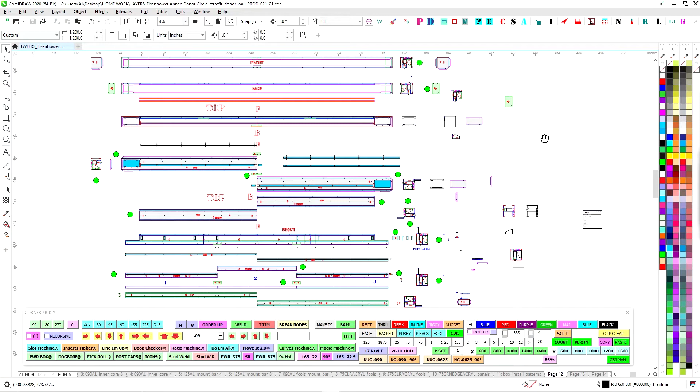All right, so Annen donor circle for Eisenhower here. Deceptively simple, but creating these boxes with slots in them posed quite a bit of challenges. We've got quite a few moving parts, but once they're all put together it shouldn't be that bad. We just have to make sure we follow the instructions and do things in order.

So you've got your parts. I broke it out to the outer shell of the 4-inch box, the outer shell of the 8-inch box, and then we have the inner cores of each: the 8-inch box inner core parts and the inner core of the 4-inch box.

You have 1/8-inch aluminum mounting bars, fairly straightforward. Put those together, and that's the top one. So you've got the top and the bottom, 4-inch and 8-inch bar. You've got the top letters here. Clamp the letters up to the bend scribe mark and bend the flange up. Just follow those instructions.

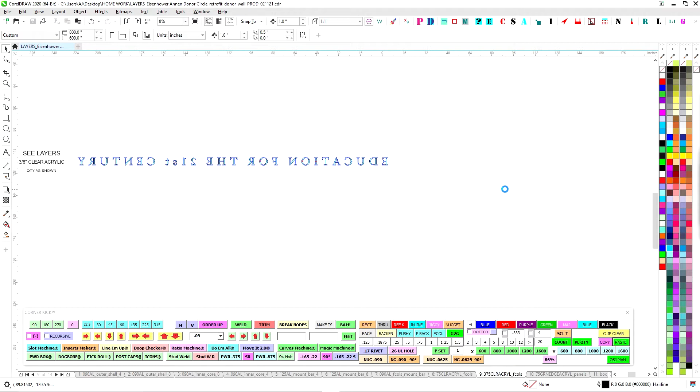We've got 3/4 inch acrylic with 632 studs, and same thing, we got 3/8 acrylic with 632 studs. Jim called out 3/4 inch green acrylic for that, green edge acrylic. Two mounting patterns for install, separate ones. So those are just the bars basically with instructions.

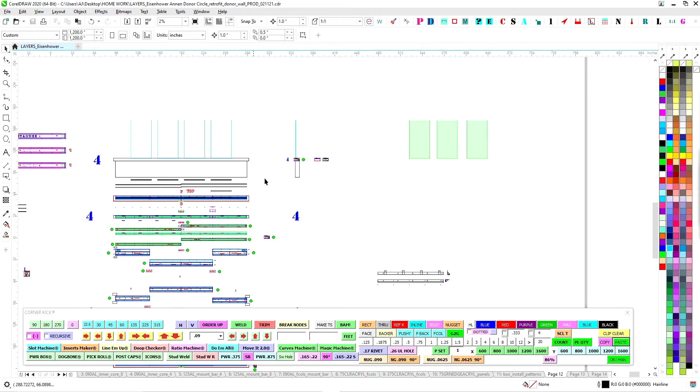From the very top level of this, I went ahead and broke this apart, because naming this bottom box and top box—well, talk about namespace pollution. Anything named top would be confusing, whether this is the top box or the top of the top box. So for naming principles, look for an 8 or a 4 on all the parts. That will let you know which family this belongs to. Anything with a 4 belongs to the 4x8 box, anything with an 8 belongs to the 8x8 box. So basically top box and bottom box. That being said, this is going to be confusing trying to show all this, so I went ahead and broke this out into another page.

So we'll go over here. That's the 4-inch. We'll do this like weightlifting—do the heavy stuff first, and then the other stuff will seem light. So like I said, it's not that hard, it's just got to make sure everything's put together in a certain order.

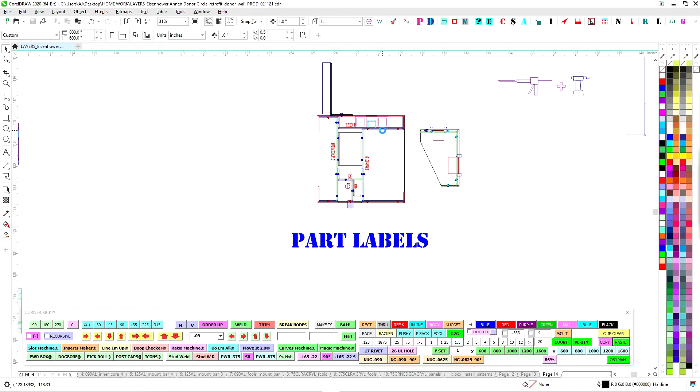So I made this to show how the parts are labeled, and essentially you're just going to start from the inner core right here with the smallest pieces, and then work your way out and assemble. Like it says over in the other thing, this is the outer shell, you'll just wrap it in the hard candy shell. So you start in the middle, do the core, and then work your way out.

And I have it exploded here, so this is what we'll do. You'll see that all this stuff is labeled.

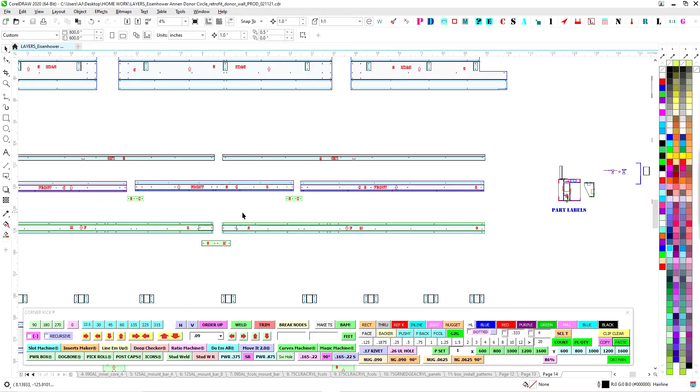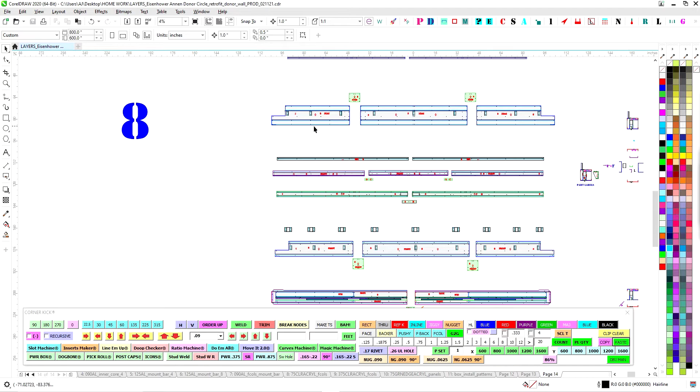The other part of the labeling name structure is, instead of left and right or whatever, I've got 1, 2, and 3. So 3 is always on the right side as you're looking at it, and 2 is in the middle—so if there's 3 pieces, the number 2 will be in the middle. The number 1 will always be on the left side as you're looking at it on the wall. So one side over here you've got the 2 in the middle, and then the 3 side over here, so all the 3s should line up on this side for all the parts, and all the 1s should be on this side. Anything 2 obviously is in the middle.

And then just look for stuff that's supposed to face the front—we'll say front. Anything with an arrow face, it's important that it is facing to the front, because like I said, this is asymmetrical. These mounting holes are important that they're going to this side. So again, just pay attention. It's not a hard thing to put together, but just got to make sure everything goes together the way it's supposed to.

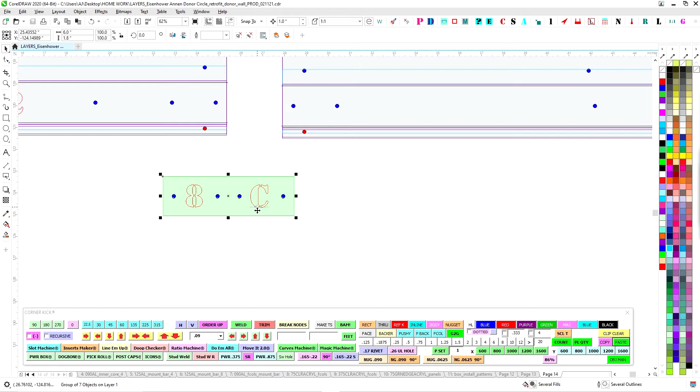So we'll start in the middle here. I'm calling this the C for center—it's this piece right here. You start with that, and then you'll have your LED tray, you put that onto that piece, that's second here. So backing up a little bit, what you're going to do is just get all these pieces, and you're going to Lord's rivet these together all as one piece first.

So get all these bent, get them clean, get them bent, and then you can go ahead and put these pieces together so they're all long extrusions. Same thing here - you're going to take these pieces and Lords-rivet them together. Get all of these assembled all together, and just be careful when you're dealing with them.

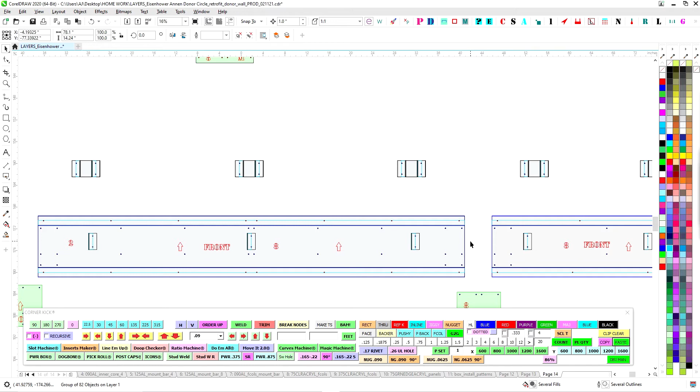They won't have the full Lords that we do on the sides, so they can bend - just make sure you're treating them with respect until they get all put together. With the lamination effect of all the staggered seams, these things are going to be super strong once we have them together. But like these guys here, you'll have this plate, go ahead and Lords and rivet that together. When you go to lift this thing, make sure you have support so it doesn't bend or fall apart until you get everything Lords together.

So I'm going to show you how to do that. Once everything's all in long units, go ahead and take the LED tray and put it together first. Then you can go ahead and Lords and rivet this stuff so it's faster - do Lords, do a couple clicos, and then just rivet it together and you can move on.

From there, you're going to go ahead and put what I call the M for middle - that's this middle angle piece, it's in green here with an M. So you have the C and the LED, you've put those together, and now you're going to bring the M together and go ahead and Lords and rivet that together, and now you'll have this inner structure here.

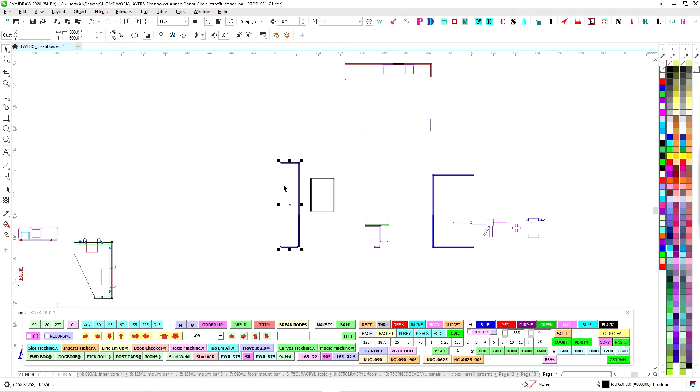Then you can either choose to do the back or the front, but I'd probably just do the front - might be easier to handle. Go ahead and take these guys, and once they're bent, Lords them to the back of the front here. So this is facing front, and go ahead and Lords those and rivet those.

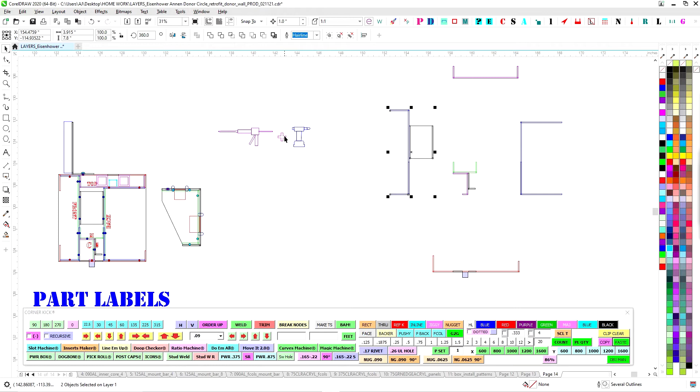You can go ahead and take care of that, then bring this whole thing together to the front. So you'll put Lords here - zoom in there, so you can put Lords here, and then Lords there, and then bring this together, and you're good to go.

Now you can see where this is, all that's left is to put the back piece on. So you'll just Lords this real good and Lords this, and that's the big top part here.

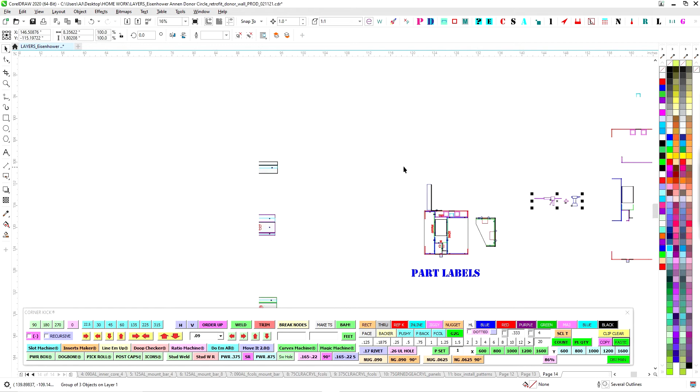So once you have this guy to this guy, and you have these all together, and you've made this core, and then you've assembled these little nuggets to this, and then you've brought all this together, then go ahead and take this whole structure and attach the back to it. And there you go - now you'll have this center core.

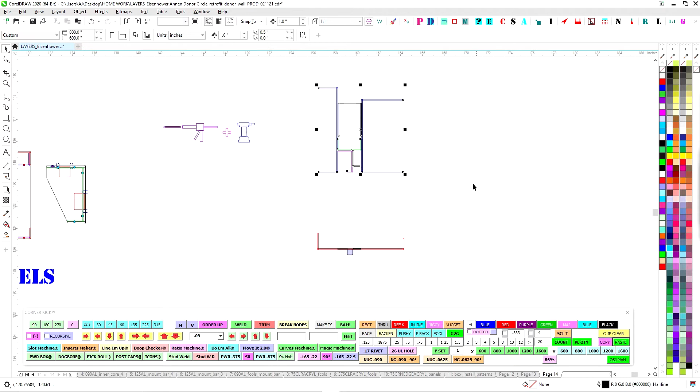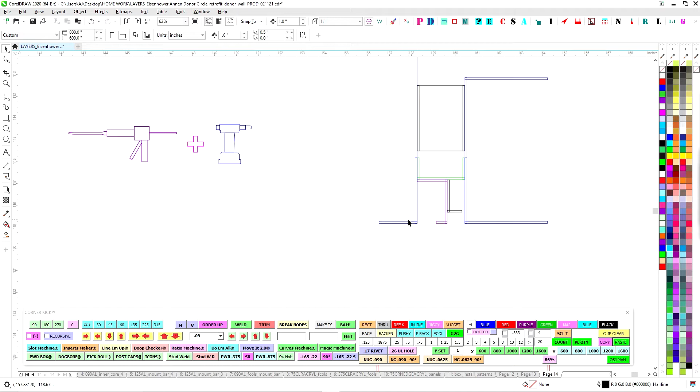What this gives you is a place for the panels to slot in - that's where that goes. Back here you'll have lights like they had, so you'll be able to put your LEDs facing down. This also creates support right in here for the slot that you'll see for the outer shell. When you go to put that on, there won't be any structure right there because you'll have the whole thing slotted, so you'll have to have this little set - that's what that little shell's for.

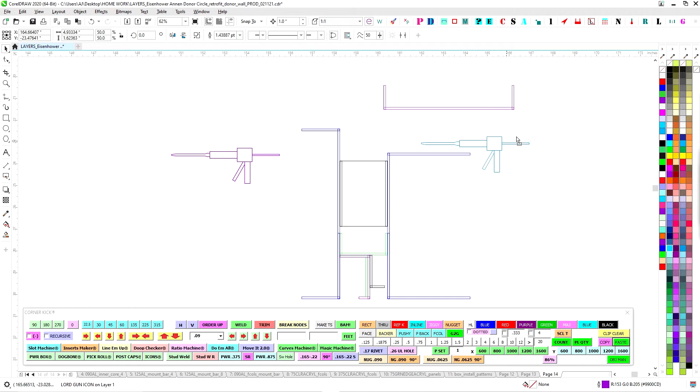So the next step is once you have this core made, then you'll go ahead and do this top piece, and I have that labeled top. That's just a little top tray that kind of faces up, and it attaches here. So what you're going to do is kind of Lords and slide it in - you're going to Lords here, and Lords all through here, and then bring this down and in. Now you can rivet here, but you do not rivet here because the mounting structure goes right here.

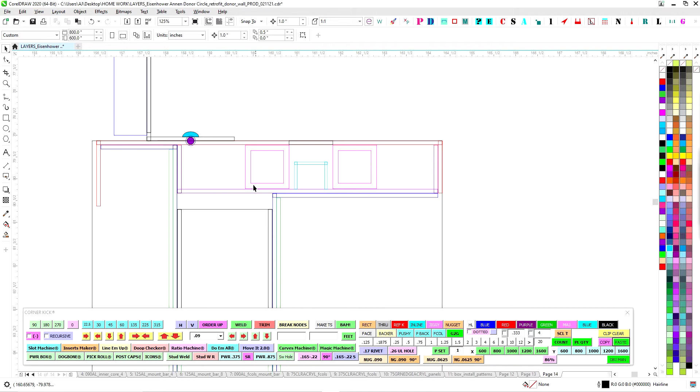The mounting bar fits right in here, so if you have rivets here, it's going to interfere with that - this is a rivet no-fly zone. You can see here where I have the circles, these are 165s just for clecos, but do not rivet here. But the blue here, you could rivet all inside where it's blue, because those rivets aren't going to interfere with anything.

On the flat parts where you're going to be putting the outer shell, do not put any rivets because you got to keep that clean.

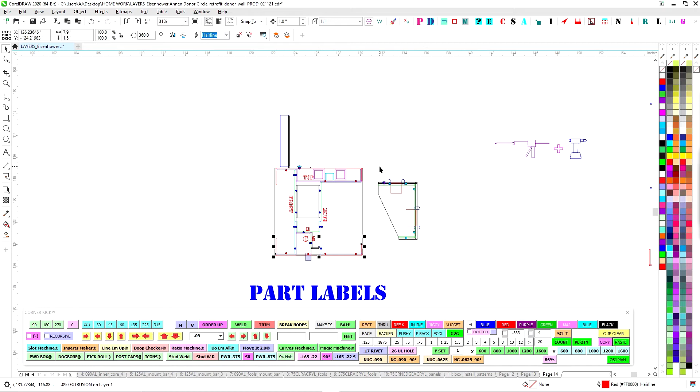So now you bring that home, and you have basically the whole inner core done. You have the top part here, and there's no center brace here. You can just put one piece on at a time because this whole thing will hold it together. So once this whole core is made, these just get welded on separately. There's no center brace thing right there. So once you have the core all done, it's a matter of putting the candy shell.

For this guy, take this piece and it will fit on the inside here, then take this piece and weld it. Don't rivet, but you can put it right here, and that'll hold it together because you'll bring these two pieces together, and then you'll have it there.

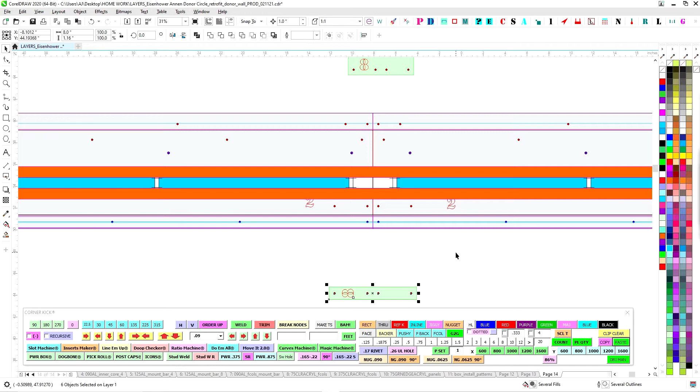Getting ahead of ourselves here. So you'll have these two pieces of 1x1 on the cut list. So we have our cut list: two pieces of 1x1, 172 inches. Got it, they have to be. You can't seam them, this has to have structure. Make sure we have the 20 footers in stock.

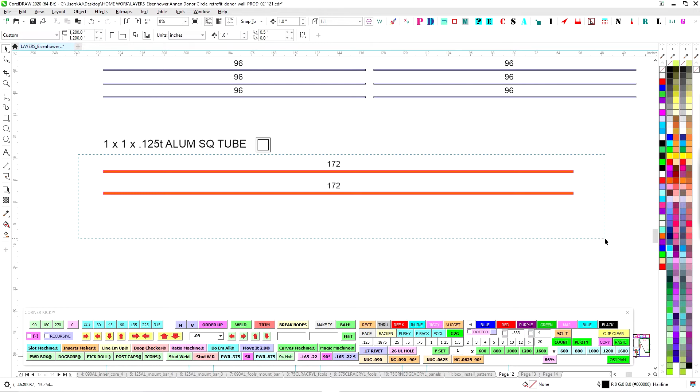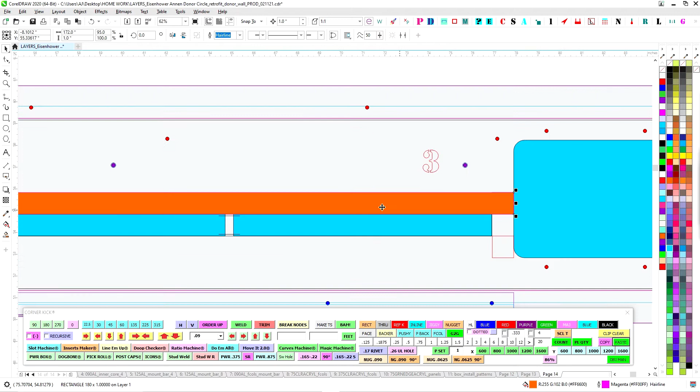Now that you have this core built, you let it chill and kick back. Then you bring these two pieces in, and you line them up right with this reference, outside, but essentially they go right up to the edge of this opening, and you line them up with the edge of the toaster slots. You weld them down real good, and that gives structure to this piece. So that's your seam - you'll have this little seam piece here, and this other little seam piece here, and you'll have these bars welded continuously, and that's going to give it structure.

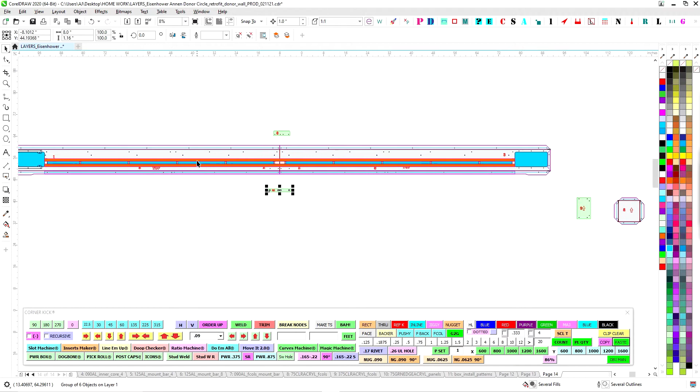Once you have this made as one unit, that's the top part, and you'll see here, you'll have these welds and you'll have those welds. Then go ahead and introduce that, and you're going to weld. Now this isn't ideal, but you're going to weld here real good, and these flat surfaces, obviously, you're going to weld the crap out of these.

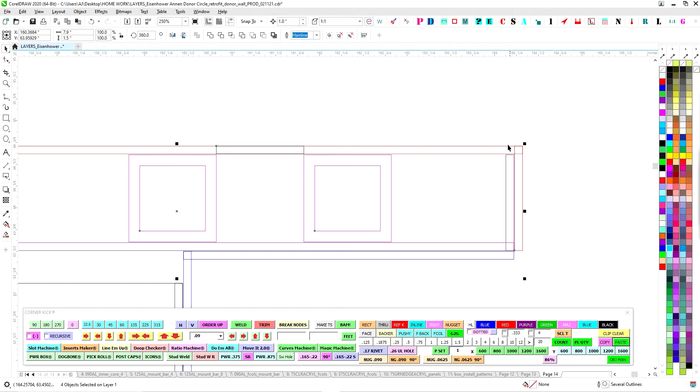But then you go ahead and inject on here and fill up this corner all the way along, and that will help smush it in here. Now that's not ideal, but at least try to get some welds in here so this back piece will get all squished in there good.

So then you'll see that this is how these two bars are going to give structure once we open up this toaster slot all the way. This whole thing would not have structure before, if it was just by itself. But having these two bars will give it structure, and it closes up the light, so there's no light leaks. So this creates a trough tray that we'll be able to put the LEDs in.

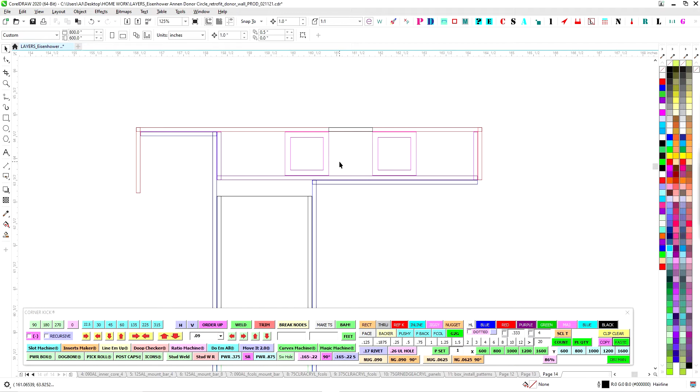Once you have that part done, you put the two end pieces in. Now you can attach the end piece to it, and you can go ahead and put your corner jigs on both sides. On front and back, you'll have the corner jigs, just like here. So now you can put your sides on and put your corner jigs in, and you'll be able to just tack it from the outside like we do.

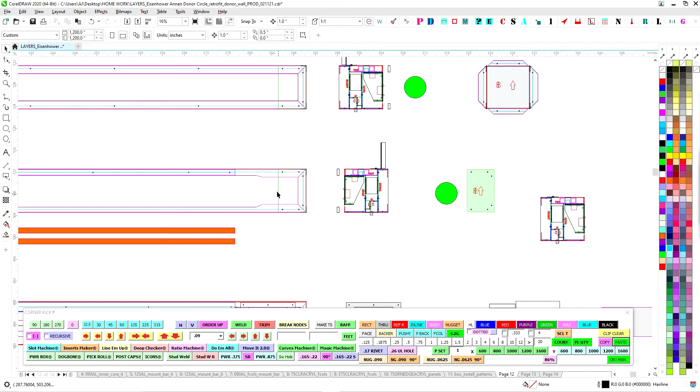Just tack around the outside, and then on the back, tack it around the back outside, and then grind off the front. You can leave the back, kind of grind it off, but the back is just that's it - there's no skin on the back. You will be skinning the front, so that'll give it strength, so you don't have to get too crazy.

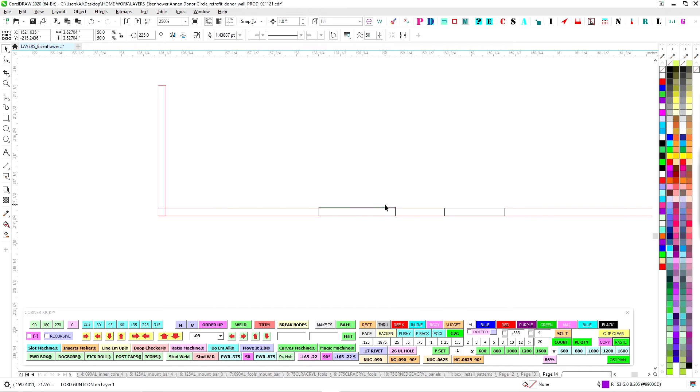Once you have all this done and you have your sides on, then you'll put the bottom hard candy shell on. You'll take your glue and glue it up real good. Glue up this little unit right here, because that's going to support that little wobbly piece. This is only like less than a half inch strip that has to be supported, so make sure you get glue on this real well. Then you just introduce the bottom section to it and glue it on real good.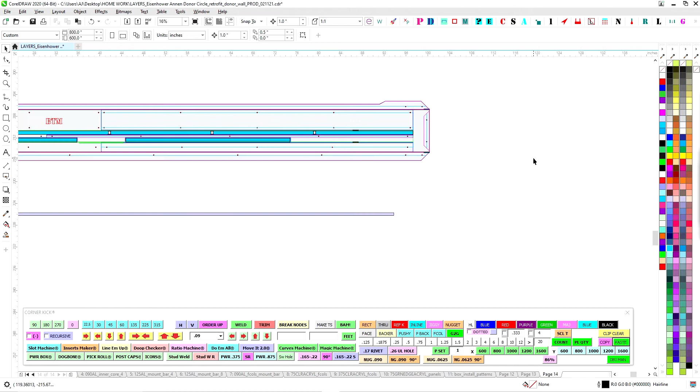That'll give you your whole piece, and then you'll be able to tack at that point. You can tack the sides here to the backer and all that, so you'll be good to go. There aren't any internal bars or anything like that, but you'll see where the cleco holes are, where that little strip lines up right there with the toaster slot for the panels. So just make sure that all looks okay. I would definitely test fit all this, do not just pop glue and go.

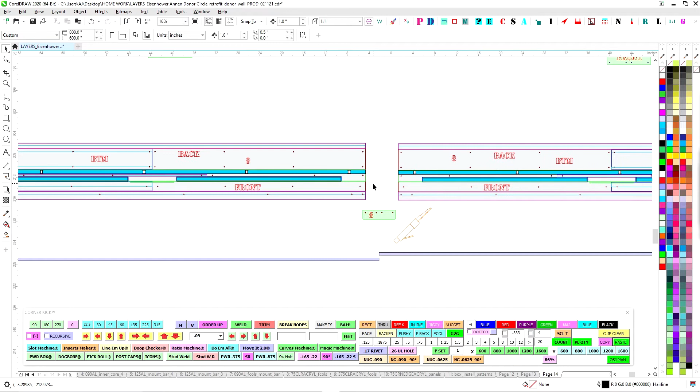Oh yeah, we do have a little brace here, so you'll put that brace together. But just be careful when you're bringing this together. You might actually do the bottom piece in two pieces. This is just to kind of hold this together, but since you'll be lifting this and there's nothing holding it together -- the top piece has the two 1x1s, right? So you can do this as one piece and bring it over.

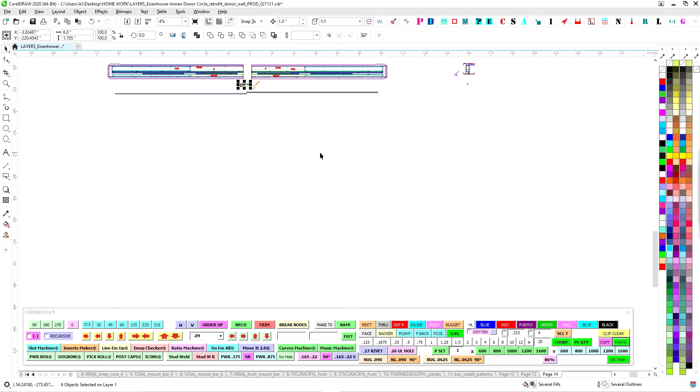This one you might do a section at a time. So you might just glue the left side on and tack it, and then make sure you bring the other side in and make sure this lines up nice. This could help you, but now that I'm seeing this, it might be advantageous to do the bottom in two pieces. So anyway, you'll have this flipped over on your table, and just work from the bottom.

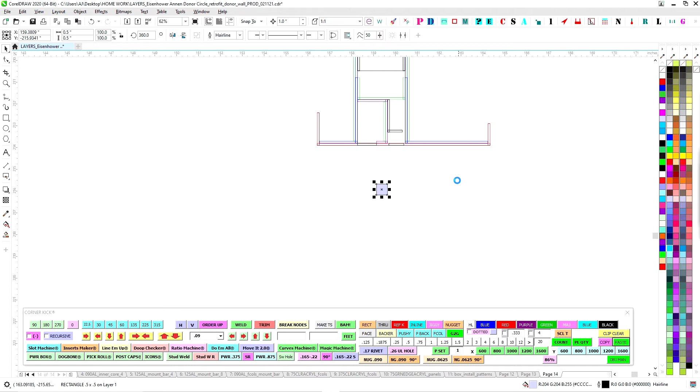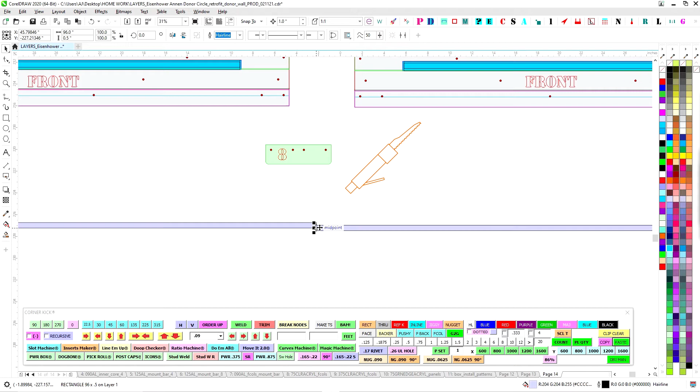You'll just work from the bottom up, and then, like I say, just put the pieces on, get it all glued. At which point you are ready to put the little decorative bar on. Once that's all done, take the decorative bar and glue it right to the bottom here. That will create that bar that they have on the original wooden boxes -- this will create that decorative bar. Because that only comes in 12-foot sections, it does have to be seamed, but it'll be seamed right in the middle, so just make sure your seam is sexy. Try to make it as clean as possible because you will be freehand gluing this.

Now I have the bar lined up to the panel slots, as you can see here. So this is a 16th off from here -- this is the LED slot, right? Now you can choose when you freehand this to either eyeball the center, kind of just center it if you choose, or use the panel slot as your alignment tool. Just make sure that it's all lined up.

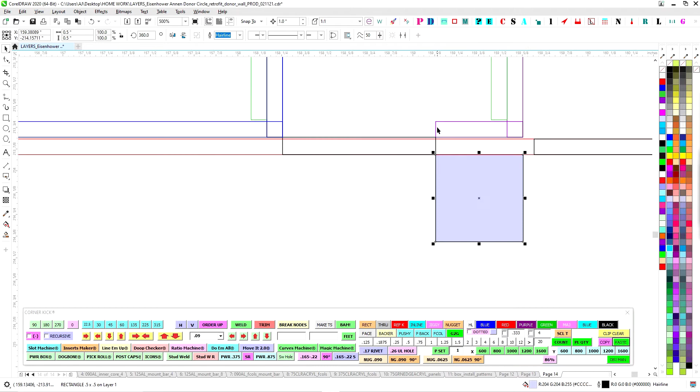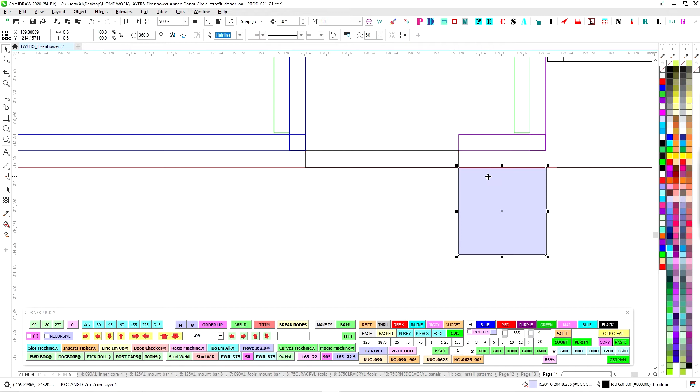Now since you'll be freehand gluing this, make sure that it doesn't slide around. Make sure you either clamp it or do weights or something on it, but pieces have been known to slide when you turn your back on them, sometimes just from lack of resistance. I've had that happen where you think it's all in place and you come back five minutes later and it's slid a little bit just because of viscosity. So just make sure these stay where they're supposed to be, but you'll just be freehand gluing those. The bars line up to the ends of the toaster slot, so you'll have one there and you'll have another one there.

Essentially, once you get that glued on, all that's left is to put the face on. You'll just glue the faces on the box, the top box there, and that box will be finished at that point. So again, it's not a whole lot of work, it's just making sure everything goes together and everything's straight. But you've got your things -- you've got a stud pattern there for the little letters, so make sure the proper... again, this is side 1 and this is side 3.

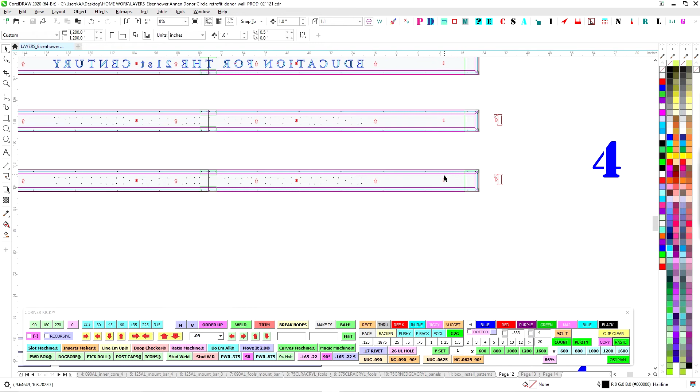Make sure that they are on the right sides, everything's facing up. That will take care of that top box. These will go on after you stud and bend these up, but that's after paint. Those go out separately, so there really isn't anything left for the top box once you do that.

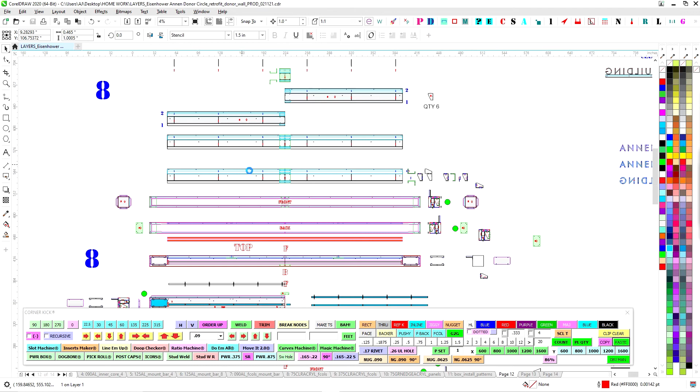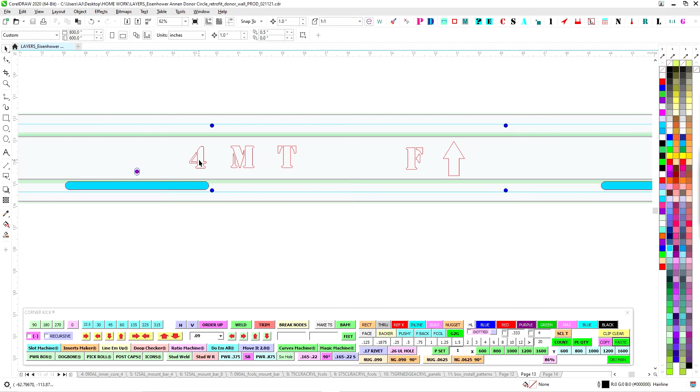So while we're concentrating on the boxes, let's look at the number 4. The 4-inch box is the same thing, but it's a lot less stuff. You'll have the same naming structure here. You'll have your middle box pieces, I just have those as M, and M bottom and M top. So 4 is the number, M is the middle piece, top is the top.

It's important that on the top one here, this faces out, slots go towards the wall. This is for mounting, so you want to make sure these holes face towards the back. Again, you're going to put these together first as units. Same thing here, put all these together as units, get them all ready. You'll have a front and a back, so your back has slots for mounting, all that goes to the back.

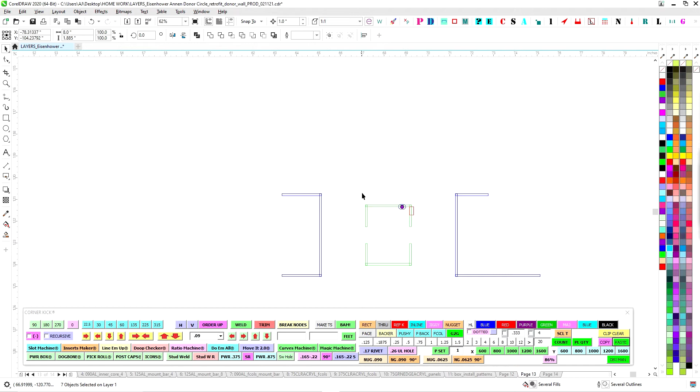Simple enough: 4 middle top, you'll just lords that to the front face pieces, do those two. You can do lords and rivet on that for quickness, just lords rivet, then bring this guy up here and you're done. Lords and rivet, boom, boom, done.

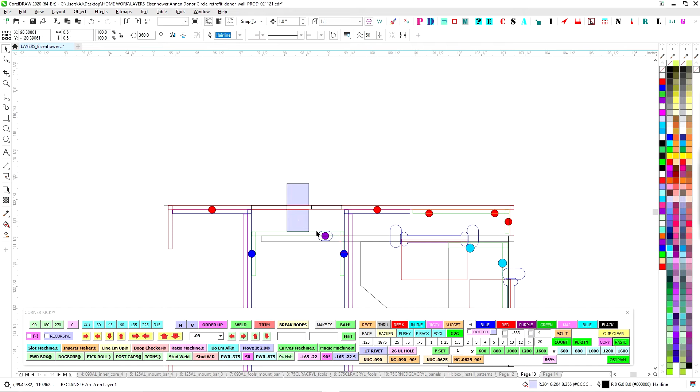Same thing. Now on this one, in order to give it strength, we are going to lords a solid 1/2-inch bar on the inside, similar to what you did, except you did two 1x1s because it's beefy and big. So you're just going to do two 1/2-inch bars, but one is going to be to the outside later.

So that's going up here. So let's see where we're at. Yeah, here we go. So once we're done there, then take this top piece. You aren't going to put this together all at once, because this will be way too wobbly to try to do all in one piece. So you're just going to do one piece at a time, but you are going to lords on the inside.

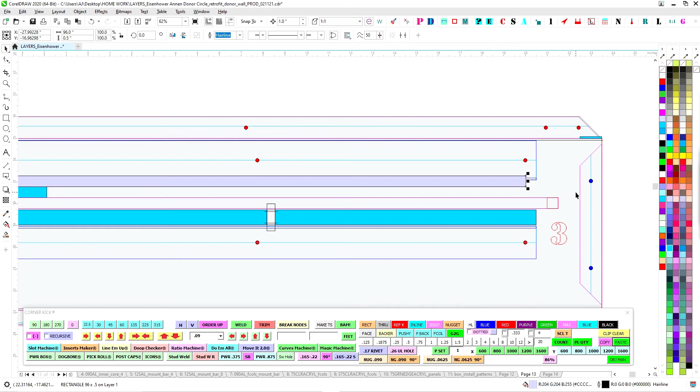You'll see where the bend scribe is here. You'll take your 1/2-inch bar and lords it right in there, and it goes a little long, you'll see there, and it'll be flush. This part here will be flush, and that way you can see where all that will mate up together. Now you want to make sure that this bar doesn't extend out at all, because then you're not going to be able to get these together.

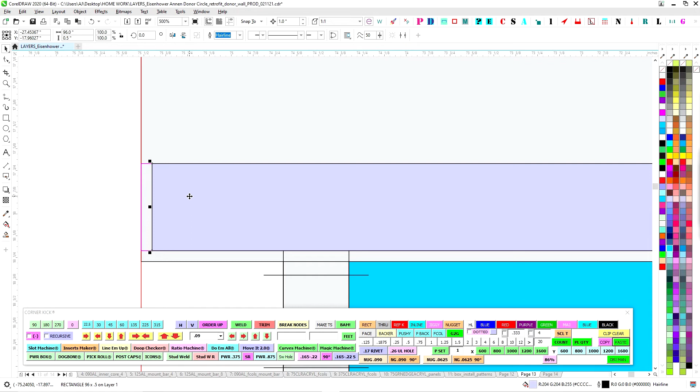So you want to make sure that if anything, you're in a little bit, but just make it flush, make it nice. And again, I'm lining that up with the panel toaster slots, so line that up with the panel toaster slot edge. So again, you'll put that there, and that looks like this. You'll lords that on, and then once that's on, you'll just introduce this here.

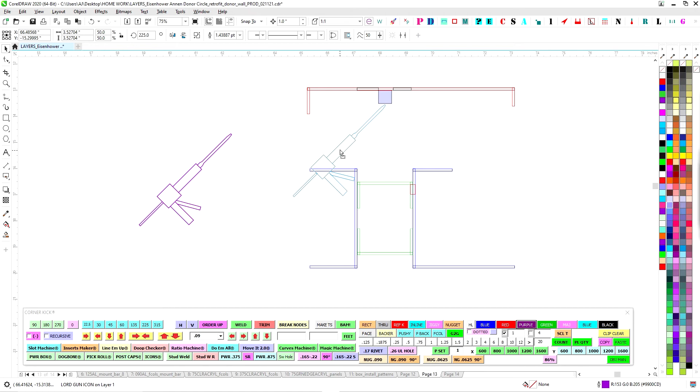When it's time to lords this guy on, you want to make sure that you get the lords both on the 090 section here, where this is obviously going to mate up right here, but you want to make sure you get lords really good on the bottom of this bar, because this is going to hold in place once you compromise this structure and cut all this out. Then you want to make sure that you've got that lords right there to hold this little unit in place. So that's important there.

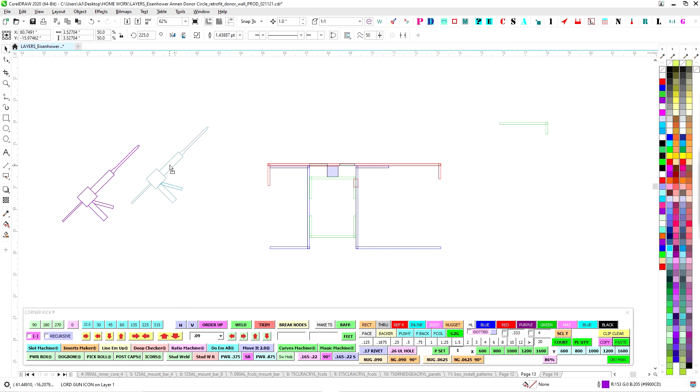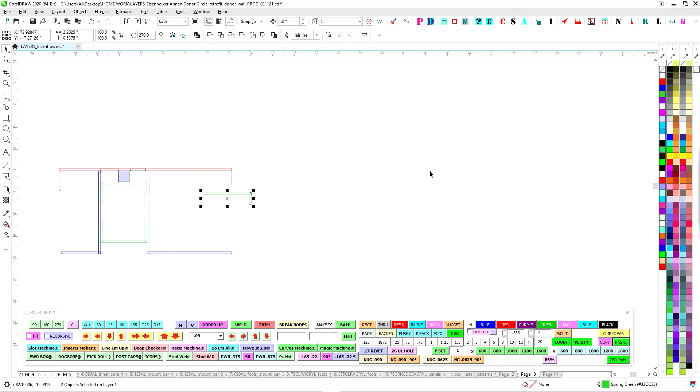Now you'll have a little brace that you'll lords in later. So once this is all together and you have both pieces, like the bottom one of the other one, go ahead and do these in two separate pieces. But then you will have this little nugget here that you can lords in later to give this support, because this will be unsupported back here. So once that's done, then introduce this unit and lords that in, and that'll help strengthen that seam.

But don't do that first, do that after. So once you have that all done, don't put this on yet, because you'll want to flip this over and put the other side on.

So once this part's done, flip it over onto your table, weld this up real good here, and then just bring that home, and then you're done. So that's all welded up.

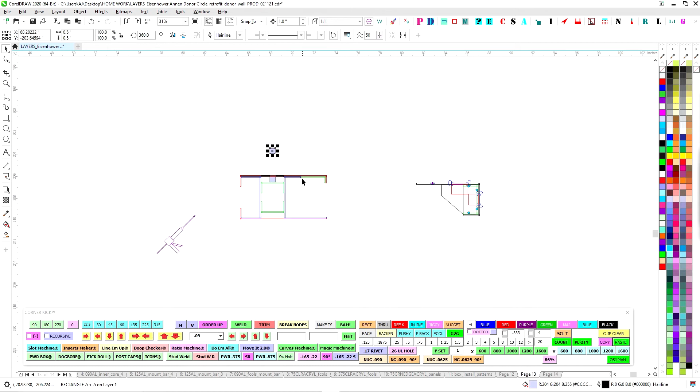Then once you have it all done, do the same thing. You're just going to weld this little bar onto the top. Again, you can choose to use the panel to line it up, that's fine. And that right there gives you your slots. This will be your panel slot, and this bar divides this, and this will be the light slot. And so we'll put LEDs in here.

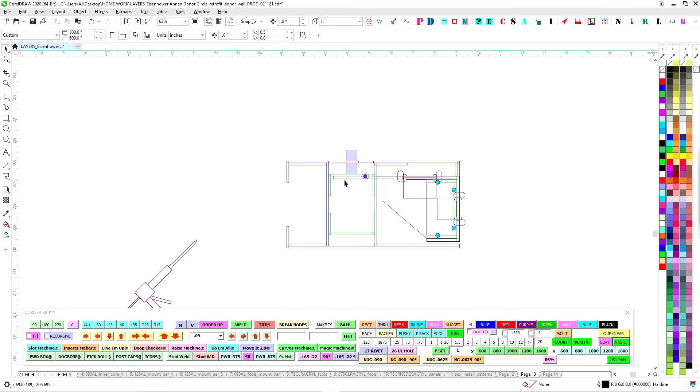Now we'll get to the mounting, now that we're done with all this. Once you get these 1/8 inch bars, this is going to slide on like this, and it's going to slide all the way in. Then strategically, these screws will hide inside the LED slot, and we'll be able to screw this onto the mounting bar. That's why you have to make sure these slots all line up and they're facing the right way, because the mounting bar is going to slot right into these, as you can see here.

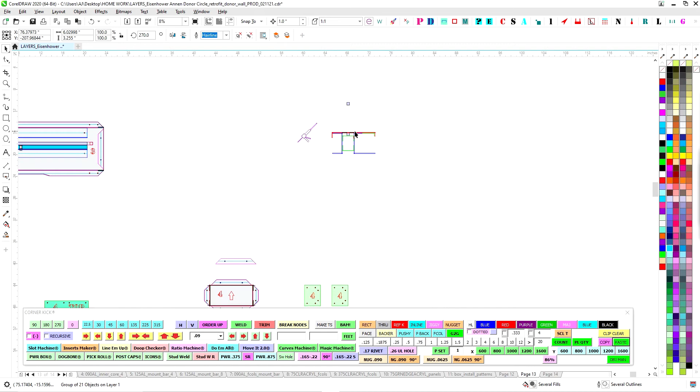So you just want to make sure all that lines up nice. Then you'll weld on your faces, and you'll be good to go. Oh yeah, I forgot - it's just like the other one. You're going to go ahead and put the top on, and then do your sides and your little side braces. Do all that, and then seal it up with the bottom, just like the other one.

So then this guy here, you want to clamp these flanges, but you don't have any other flange all the way - all you're doing is bending this. So when you go to bend this, support this. Do a buddy system, because it's important that this flange bends square, it could twist or something, not having a flange all the way.

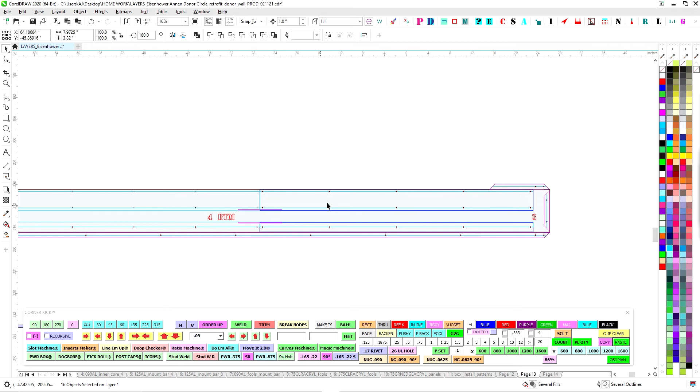But the back of this needs to be open for that mounting bar. As you can see, there's no flange. There's a flange on the top, but there's no flange on the bottom, just on the ends there. That allows you to mount the side pieces.

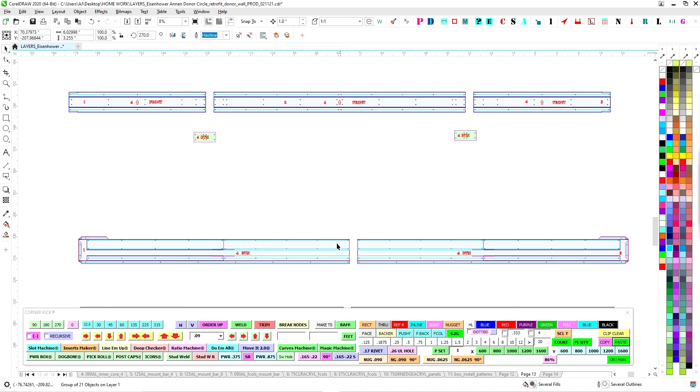So be safe with that, because you're only clamping this one piece. You might have to have a buddy to help you lift that. But otherwise, I think all of that makes sense. If you have any questions, give me a call on all this stuff for sure.

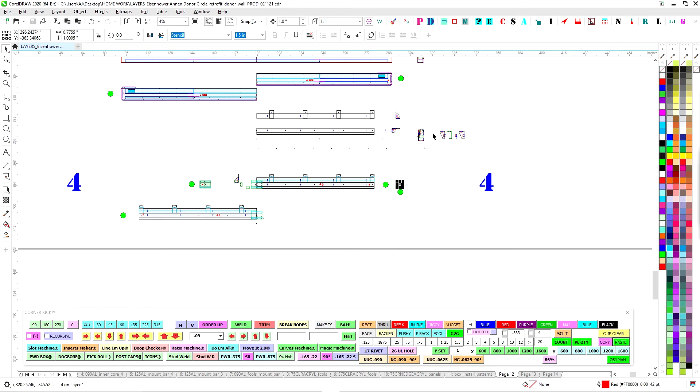So mounting bars, pretty straightforward. You're just going to bend them up, and then slide in - let's see, where are they - there you go. So the bottom one's here. We've got dog bones, we're using dog bones in 1/8 this time, so we're trying that out. For the bottom one here, just slide these in, tack them in, and you'll have that channel shape like you see there, it'll be like that.

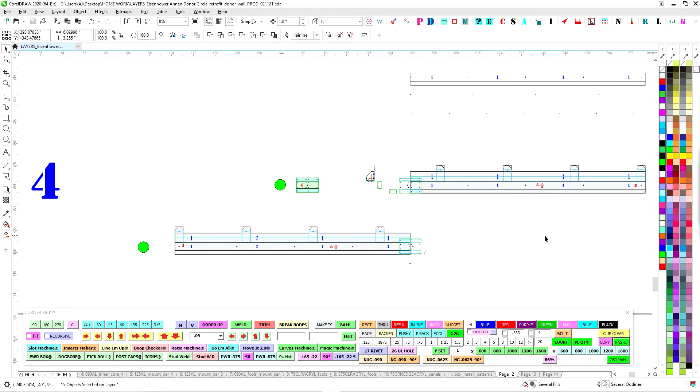Once those get bent up, then you can go ahead and weld in this brace here as well. I did 0.193 holes for that, so it's a little easier to route. Keep an eye out for all these little pieces. Do the bottom bar, same thing with the top bar - same thing, bend it up, slide in the pieces, just a little bit bigger is all, but it's just a little bigger tray. Looks like that.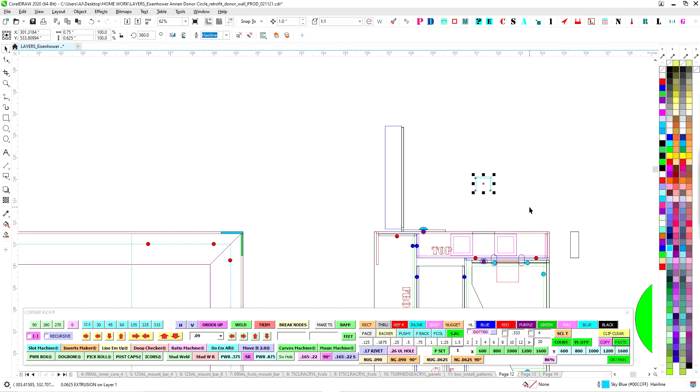So let's see, I'm going to go ahead and do an LED tray for the top, so that way the RGB will sit kind of closer up. This guy here, I think we can just stick LEDs right to this tray all the way along, and that'll be the light coming out here.

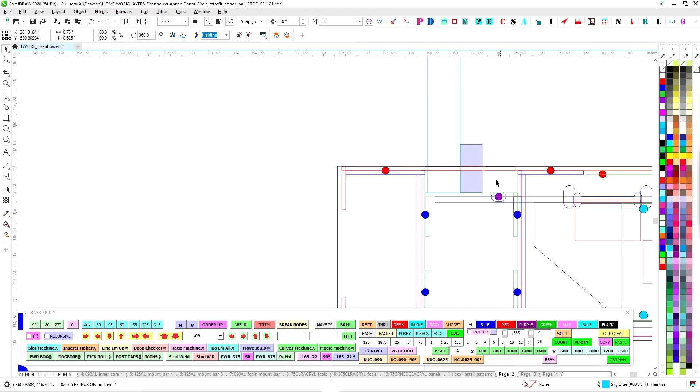So we'll have to see about that once we get to it. We'll jump off that bridge when we get to it.

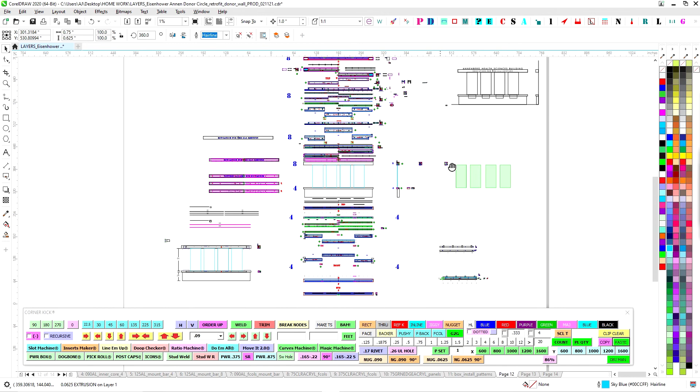So all right, so we discussed this, panels, wiring - this will be more for install. We discussed with Jonathan on install. They're going to use the existing wood base, bring 120 through the wall and up inside the wall, then poke up somewhere here, inside next to the mounting bar, inside the box. So that is what this is for.

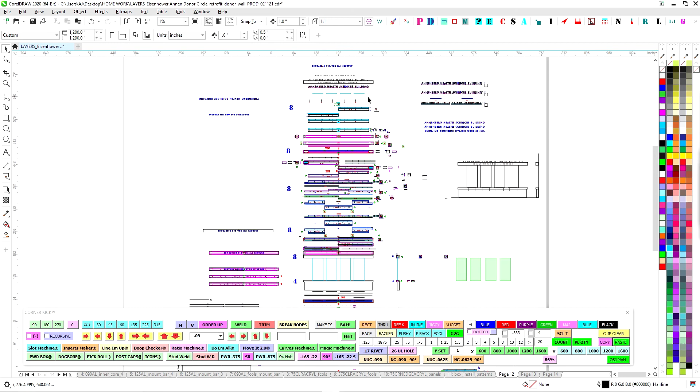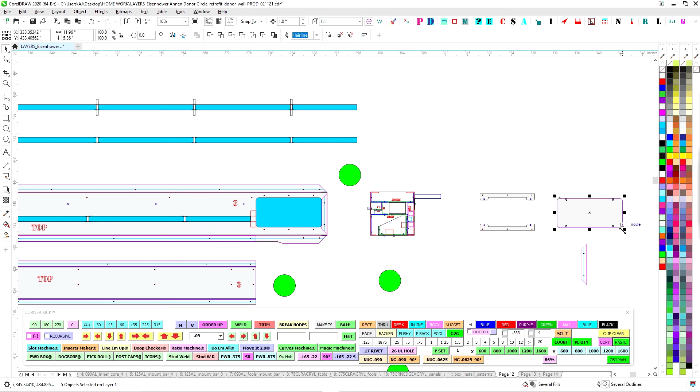The power is already on the number 3 side, over here on the right if you're looking at it. So they've already run wire and stuff there. We're guessing we're going to keep it over here, but theoretically I made openings on both sides just in case.

So we're doing the max bright 12 volt. I'm thinking we'll just use keystone, little small guys that'll fit in there, and we'll have to just go on the fly to see how we're going to wire it up and what it's going to look like. It's probably not going to be pretty, so we'll have to figure that out.

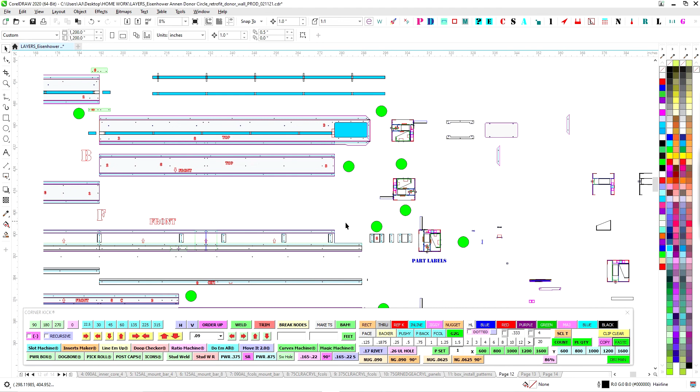But essentially this pocket here - I notched the framing, so as you're looking at it from the front is where this box lives. You have all this room here, plenty of room to put the RGB controllers. That's almost 5 inches tall and almost 10 inches wide.

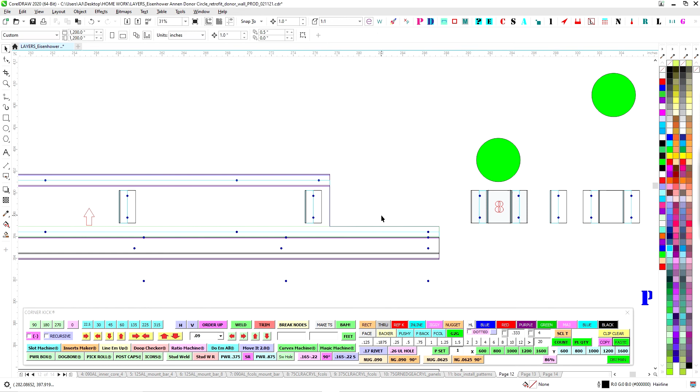So we could stack some keystones in there, or we could do a Sloan 120 watt 12 volt or something like that. We'll figure something out. But anyway, I think we'll have 2 controllers in there as well, so it'll all be packed in. That's where the power is going to live.

Disconnect switch, we'll have to figure out how we provision that. Obviously we can't have it sticking out on this thing - it's not going to look pretty. So we'll discuss that as well once we get to that point.

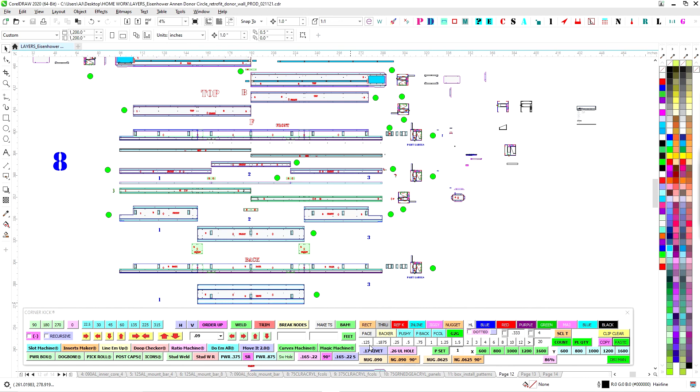But this is enough for you to start building on the boxes. Again, it's important to work in order, so just follow those orders - working from the core out. Put the core together, then put the core to this part, then put that part to that part, and then encase it from the top down in its hard candy shell.

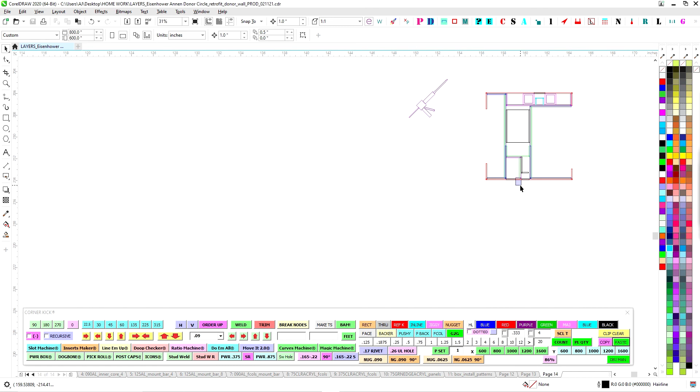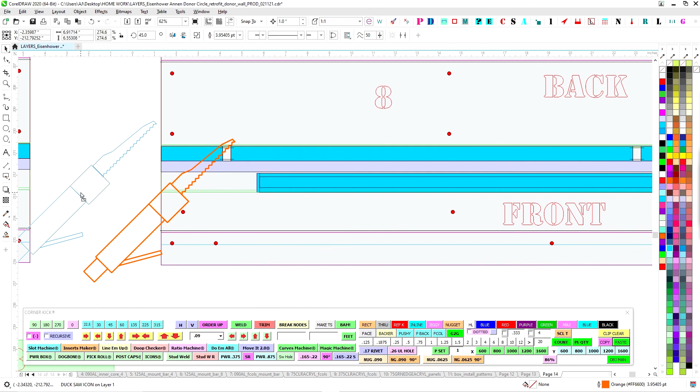Oh, one other thing - once everything is done, you'll probably want to do this. Before you weld on the final decorative bar, you're going to want to cut open on both the number 8 box and the number 4 box. You'll see these are temporary holders right here to keep these slots some structure while it's routing. I went ahead and weakened them with a bend scribe, so you won't be cutting the full depth.

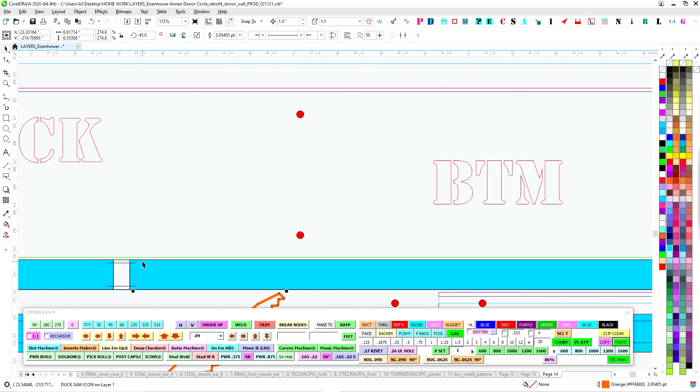But cut these little tabs out that you see on the back LED side - it needs to be a continuous chopped out chunk. So once everything's welded together, but before you put the decorative bars on both the 8 and the 4, either duck saw them out or take your cutting wheel, but be very careful and make it look nice. Just run up against the edge and chop these little guys out. These are only 3/8 of an inch, so they're pretty small, but they'll be enough to give structure to hold it all together until you get all this put to the core, and then go ahead and slice those out.

Same thing on the number 4 - that's only on the top piece, but you'll have the same thing right here. Again, put the top on, put the bottom, and then before you put your decorative piece, slice those out, and you'll be good to go.